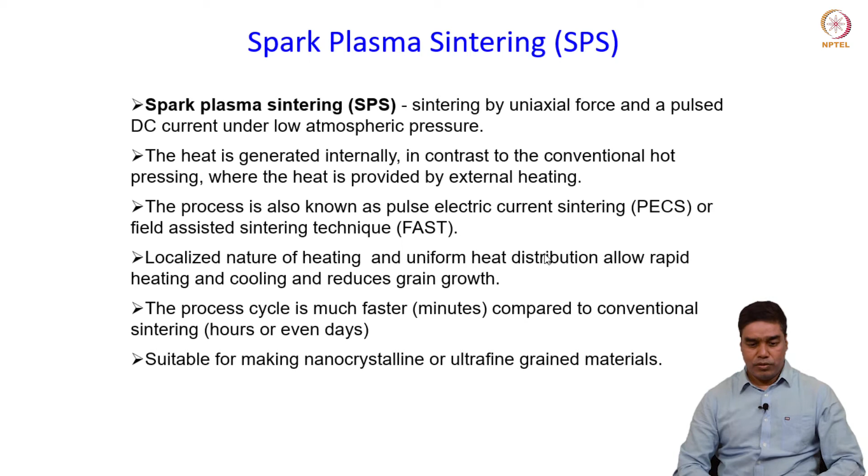So what we have discussed in the previous class is that there are basically three stages in the spark plasma sintering process. First, there is an electrical discharge between the particles when the electric field is applied, and this leads to an intense localized heating which leads to purification and cleaning of the particle surface for better bonding to take place between the particles. Okay, this also leads to melting at the contact points because of the high localized temperatures, and that again is helpful in bonding the particles together for the densification to occur.

Okay, and as I said, the heating here basically takes place by the Joule heating mechanism, where a pulsed DC current flows from particle to particle through the necks and results in heating. Okay, and this kind of heating also results in enhanced diffusion and neck growth, right? So that ultimately leads to faster densification in this process compared to the conventional sintering processes.

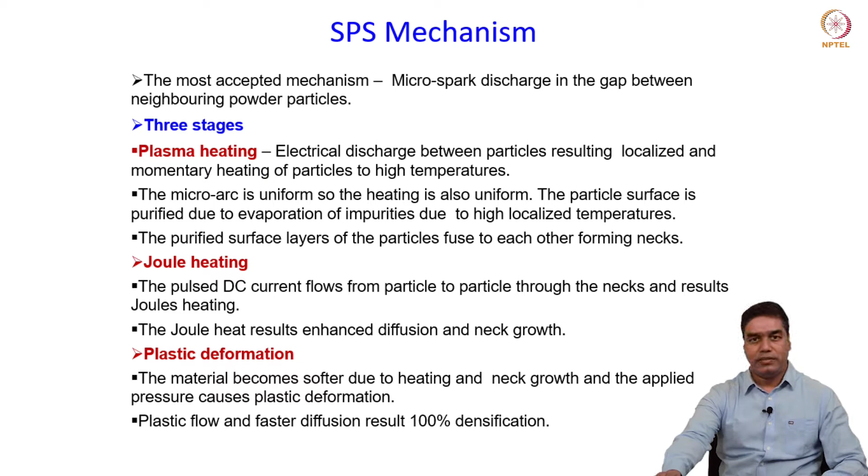And finally, when the pressure is applied after the heating has taken place, it will go through plastic deformation and the densification will occur by plastic flow. Okay, so this is the basic mechanism of the spark plasma sintering process. Now we'll continue on this and we'll see further details of the SPS process.

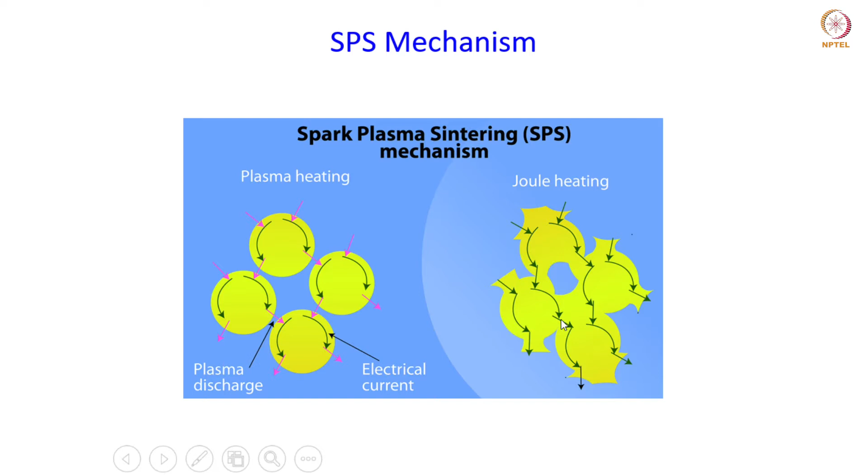So when you talk about the SPS mechanism, it is basically the plasma heating and the plasma discharge which is set up in the gap between the particles, and that ultimately leads to this Joule heating which results in heating of the compact and densification. Okay, so here the electric field is applied through a DC pulse which is on-off type.

so when the DC pulse is applied, first you have this generation of the spark plasma as we have seen before, and this basically leads to surface activation, right? And then due to this sparking between the particles, intense heat is generated, and due to that there is evaporation, melting and purification. Okay, so due to the intense heat, the particles also melt at the contact points, and evaporation also takes place, and that in turn leads to the purification of the surface of the particles. Okay, so that's about the surface activation.

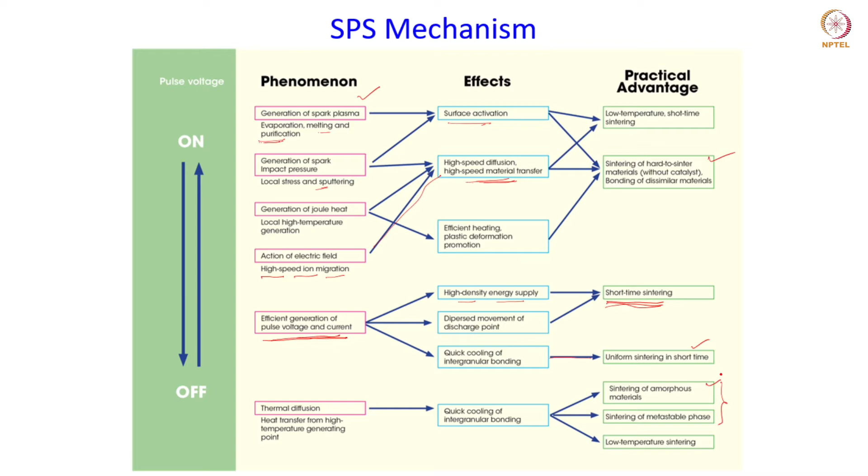Now this is a diagram which again shows the different phenomena that occur during the SPS process from beginning to the end. So in the beginning, when the electrical field is applied, a potential difference is generated between the particles, as if they are acting as two electrodes, which can have flow of electrons in between them. Okay, and therefore this has to be done in vacuum, otherwise this kind of electron flow cannot happen.

And then this electric field leads to generation of the plasma between the particles, leading to ionization, and the effect of this is basically the melting of the particle contacts and vaporization. So this ultimately leads to the cleaning of the surface of the particle and also purification. So vaporization and melting actions of the particle surface are the next step once the spark plasma is generated.

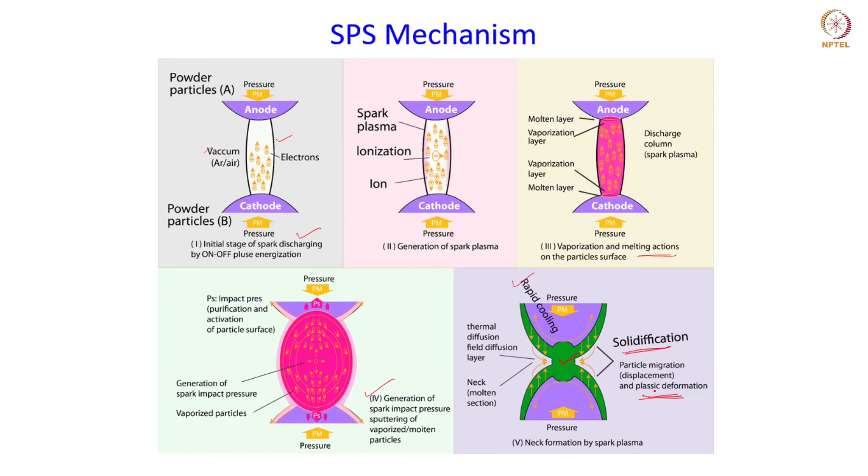But apart from that, you have similar mechanisms like volume diffusion, which occurs from the bulk of the particles towards the neck region, surface diffusion that occurs from the particle surface towards the neck, and of course grain boundary diffusion which occurs along the grain boundary between the solid particles, right?

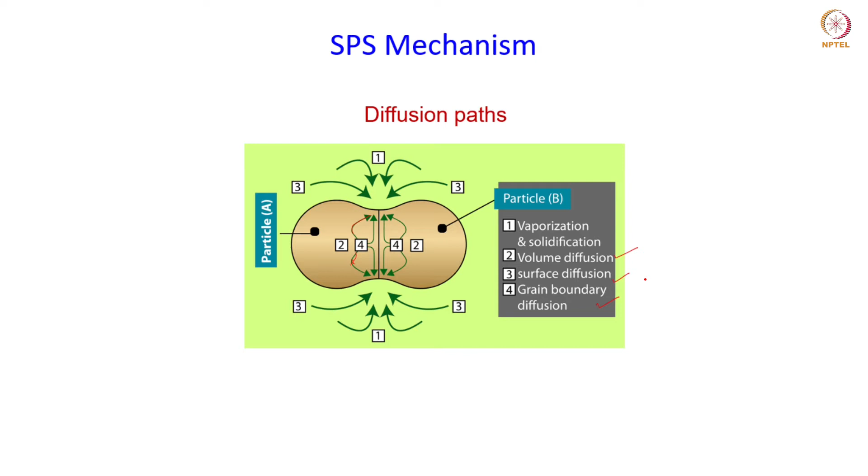Now let us see the process as such, as to how it is carried out and what is there inside the SPS equipment. So here the powder is filled inside graphite dies, because graphite is conductive and through the die, therefore, the electrical current can be conducted to the powder, and the powder is pressed by the graphite punches, right? The use of graphite here is basically to ensure that the current can be easily conducted to the powder particles.

The heating rate is typically in the range of 10 to 100 degrees Celsius per minute, but it can be higher also depending on the material and the microstructure which is desired. And as I said, a DC pulse is used as the power supply, and the DC power supply is connected to the upper and lower punches, and through these graphite punches the current is conducted to the powder which is in the die.

Here the current levels are very high, to the tune of a few thousands of amperes, but the voltage is low, so it's a low voltage high current process, and the DC pulse time is of the order of tens of milliseconds. And a pyrometer is used to measure the temperature.

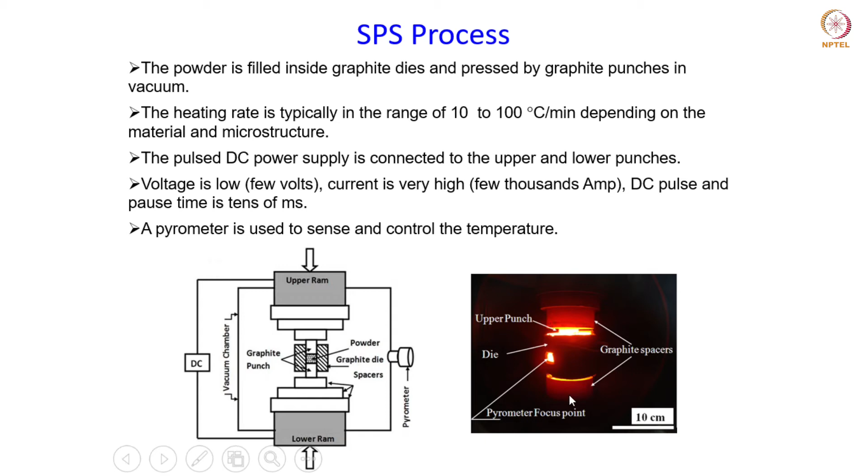And this is how it would look if you have a look at the SPS chamber when it is in operation. So this is a live photograph which was taken in our lab while the SPS was actually done.

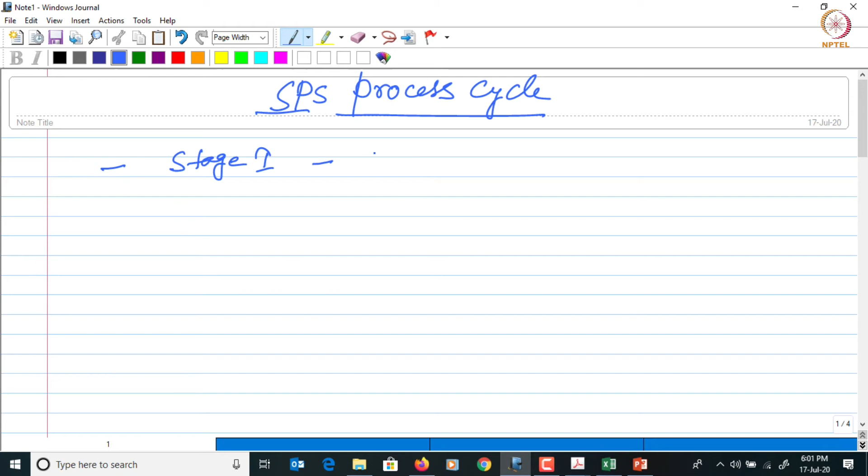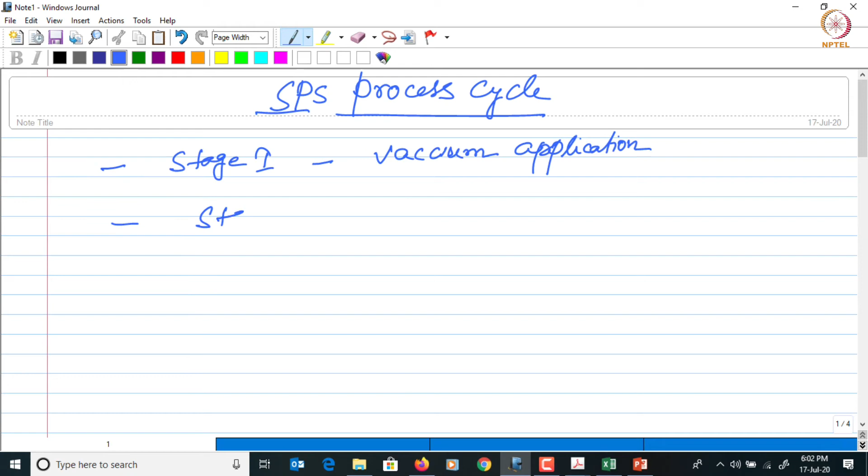So if you look at the SPS process cycle, it is basically a 4-stage process. In stage 1, the SPS chamber is evacuated. So it's the vacuum application stage. And once the required vacuum levels are reached, then in stage 2, the pressure is applied.

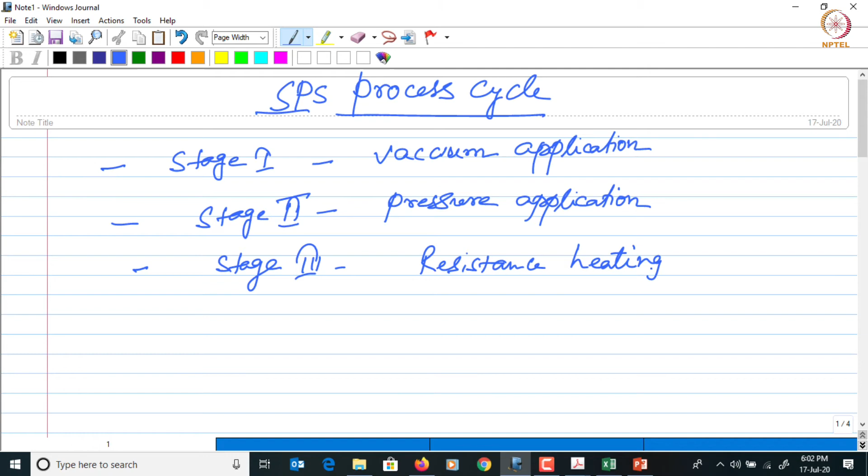Stage 3 is all about heating, where the Joule heating or resistance heating takes place, and the densification occurs under pressure. And finally, stage 4 is the cooling stage.

This is also important because depending on how fast or how slow the compact is cooled, the microstructure can change. So SPS is a process which is quite often used for preserving a particular type of microstructure because of the rapid sintering and the short sintering times. A particular type of microstructure can be easily preserved, which may not be possible in conventional sintering processes as the sintering cycle is quite long. So therefore the cooling stage is also important in this case. And stage 4 is all about that.

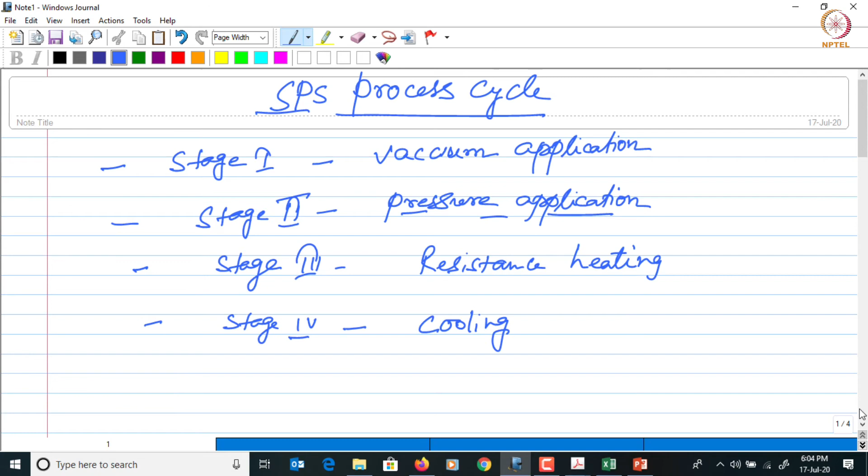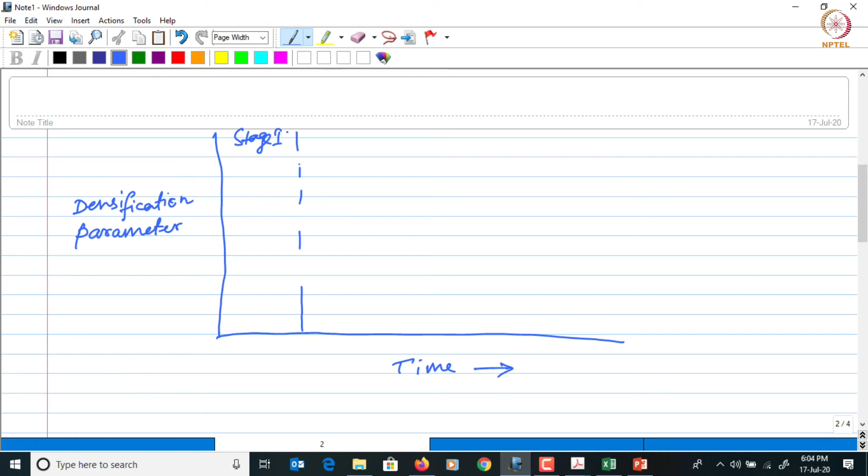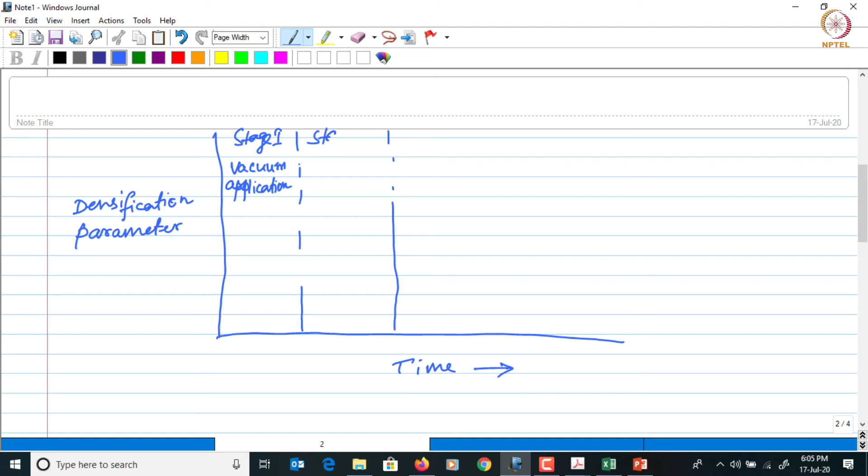It can be also illustrated with the help of a diagram like this. Stage 1, vacuum application. Then once the vacuum is reached, the pressure is applied, that is stage 2. And in stage 3, the resistance heating takes place.

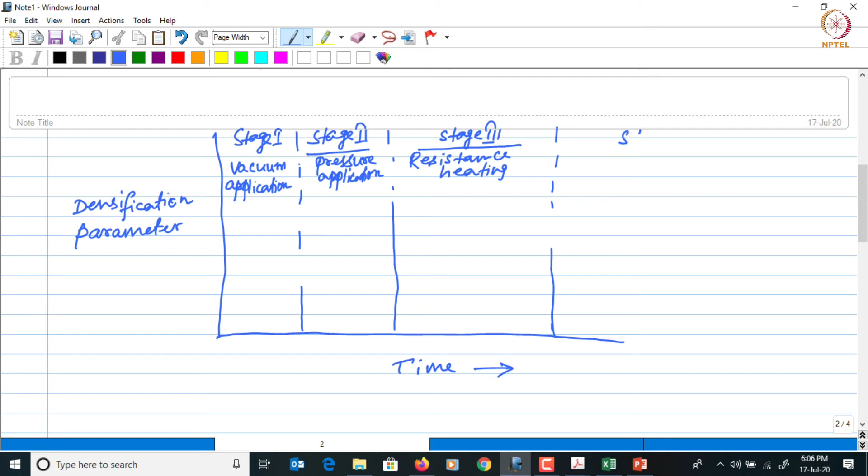And finally, once it is held at the sintering temperature for a particular period of time, it is cooled down. So that is stage 4. So pressure is increased continuously, and the compact is then held at a particular pressure as the sintering temperature is reached.

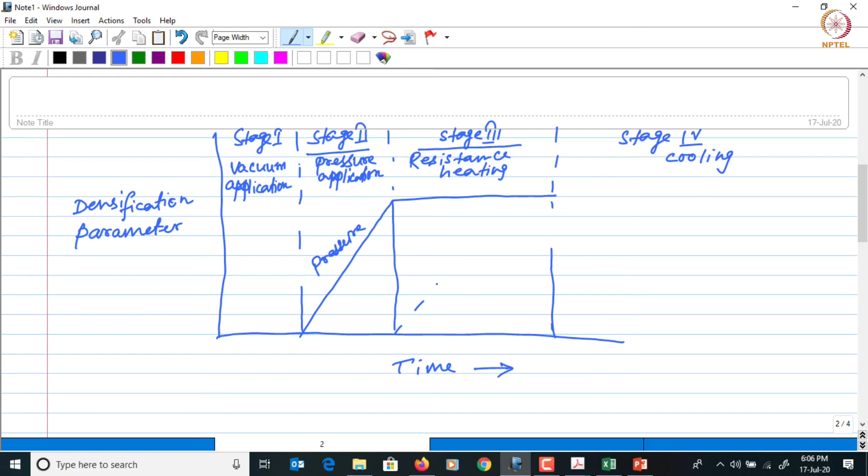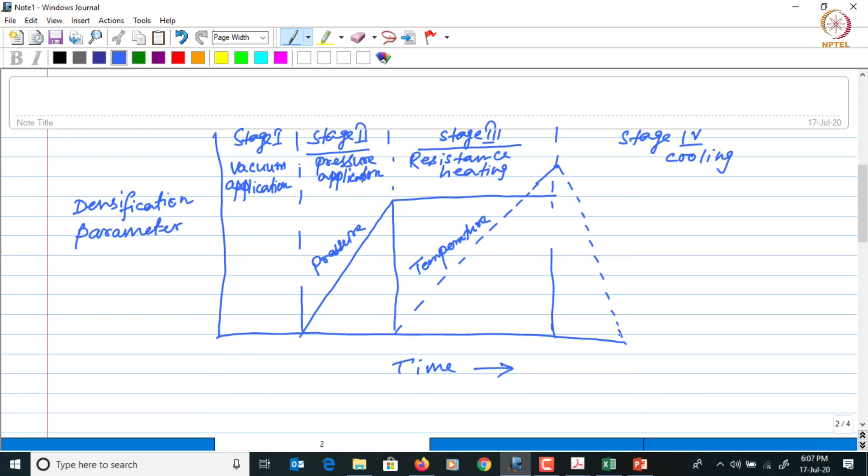And as the heating takes place, the temperature increases continuously, all the way to the sintering temperature. And once the sintering is accomplished, it is cooled down. Right, so these are the 4 stages of the SPS sintering process.

Now let us also have a look at the advantages of this process. Some of them we have already talked about before. You can achieve rapid sintering, and the sintering is also uniform because of the uniform heating that takes place. Less grain growth because of the short sintering time and faster cooling, and therefore nano or ultrafine grained materials can be easily processed by the SPS technique.

Here binders are not necessary, unlike many of the conventional sintering processes where a binder is added to the compact to aid the packing of the powder particles. And compaction and sintering are combined in one step as the pressurization and heating occur simultaneously.

And a high purity can be maintained here because of the purification of the particle surfaces, as we have talked about. When the spark is generated and there is local intense heating, it also leads to the purification of the particle surfaces by evaporation and melting.

And all kinds of materials can be processed, whether it is a softer material or a stronger material. Even difficult to process materials can also be easily processed by this technique. And it also offers high energy efficiency. And as far as the operation of the sintering equipment is concerned, it is also easy to operate.

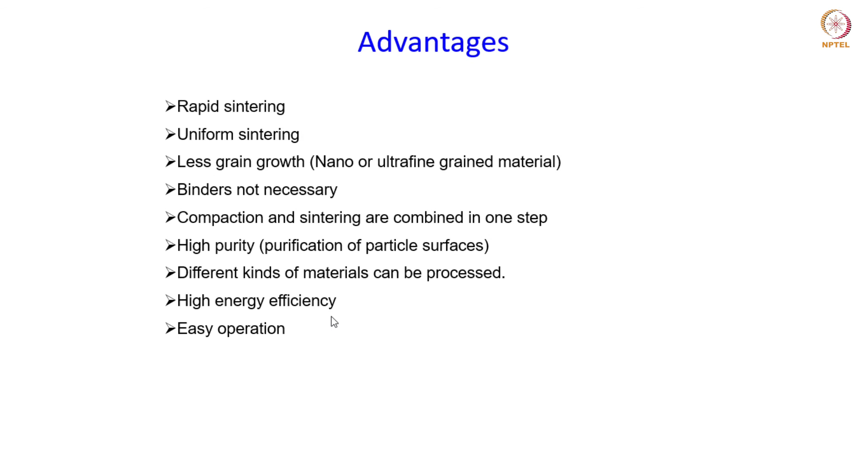So because of all these advantages, in recent times SPS has become a quite attractive process to fabricate a large variety of materials for different applications. Okay, so we have been discussing the different hot consolidation processes and their mechanisms in past few classes, including today's class. So now that we have learned about different techniques of full density processing or hot consolidation, it is time for us to have a quick recap and try and summarize these techniques.

So the need for full density processing arises from the fact that it is difficult to remove the pores completely by conventional sintering, and therefore we need methods which can overcome such limitations of conventional sintering and give rise to a fully dense compact at the end of the sintering process, right?

So full density processing basically is a method which applies the heat and the pressure simultaneously. So this is kind of combining the compaction and the sintering process in one step, unlike the conventional sintering process in which the powder is first compacted and then the green compact is separately sintered to achieve densification, right? But in this case, the powder can be directly sintered with the simultaneous application of heat and pressure to fully densify it.

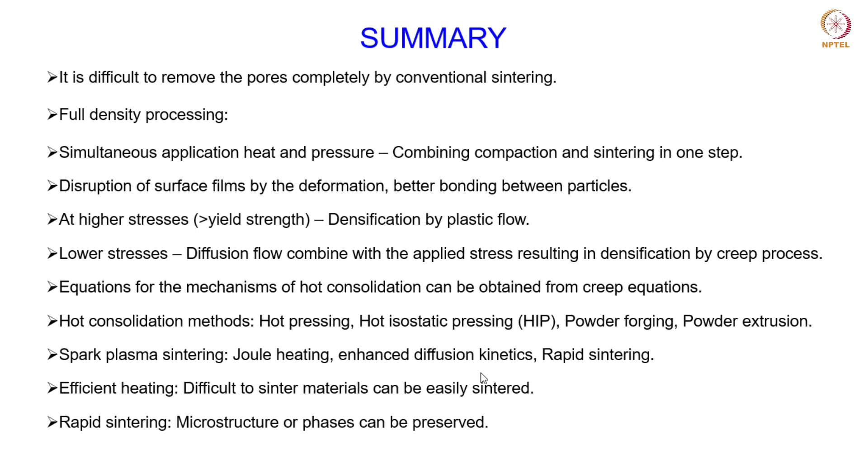So these are the different advantages which can be achieved with the help of spark plasma sintering, because of its efficient heating and the enhanced diffusion kinetics which result from the uniform heating that occurs through the generation of sparks between the particles. All right, so that's all I have.